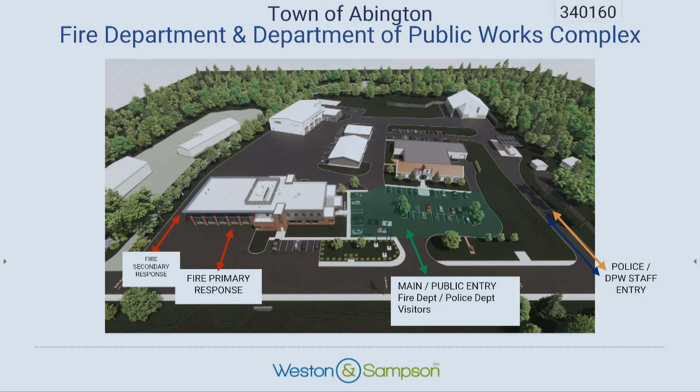Let's go to the proposed buildings. I know everyone knows how to read blueprints, but I think this is a little easier. As you can see, here's the existing police station, here's the existing vehicle maintenance and police building, and here's the proposed fire department, proposed DPW, proposed salt shed, and proposed fuel island.

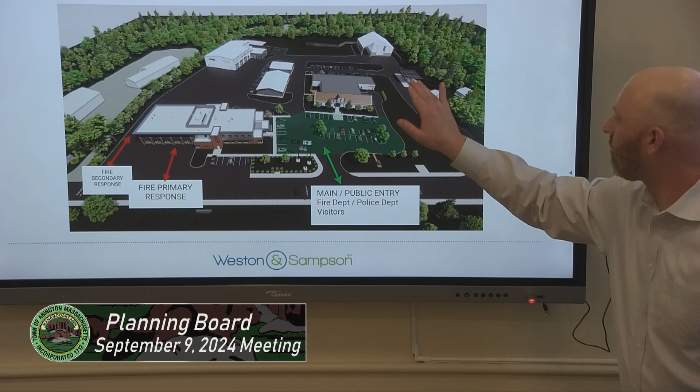A lot of the comments from SEA noted there's a lot of street openings, a lot of parking, a lot going on at the site. So we need to clarify some of the site signage and entrances—we want to make clear this is only visitor and public parking here. For best traffic flow, we turn vehicles left a lot, especially for large vehicles and apparatus for the fire department, school buses, and DPW equipment. The next slide might make more sense.

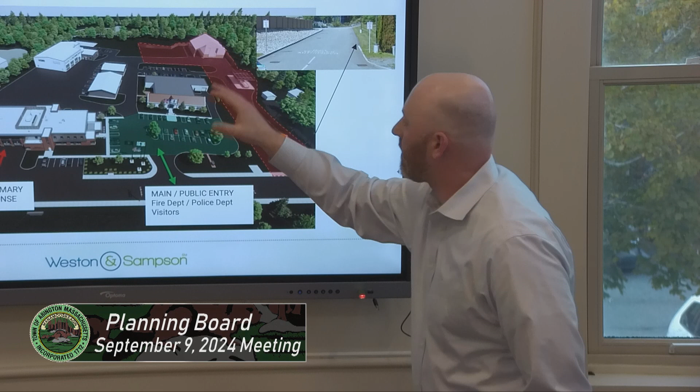Just to clarify, we are doing this project in a phased approach to help with cost and temporary facilities. Right now the fuel island exists here, so they can build the new fuel island while this one's ongoing, since it fuels the whole town—same with the salt shed. The existing salt shed is over here, so they can build the new one while using the old one. That plays into a lot of things, and here's some site signage we plan on having.

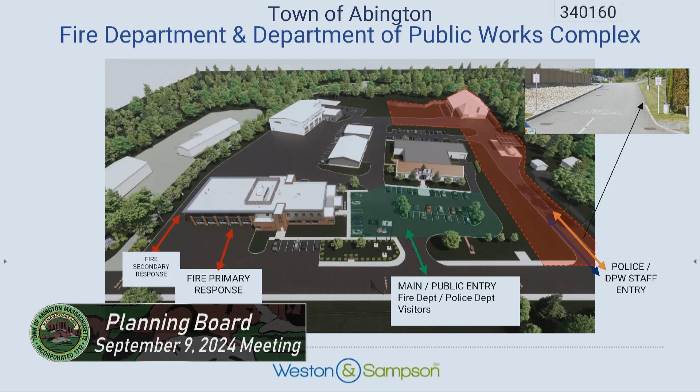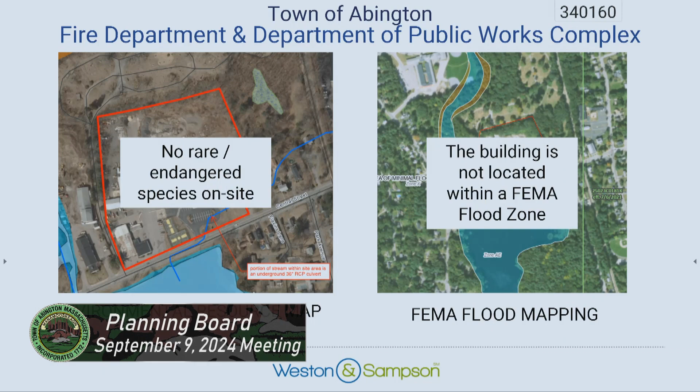Oh, sorry. Oh, Jesus. Do you have the mouse thing? Can I just back up? There's a stylus around behind the screen. Yeah, it's gone rogue. I wish all the presentations were like this. Seriously.

Alright, so here's an idea of how the trucks would typically rotate around the building. If you turn left, it's easier for the driver to see left than taking a right. So they can come through here, fuel up, salt, go back out. The vehicle storage is right here as well. The fire department will use the front apparatus bay to turn around in as well.

As you can see, this is the main entrance, and we'll make sure that's clear. But the rest of the site will be private employees only, municipal town workers.

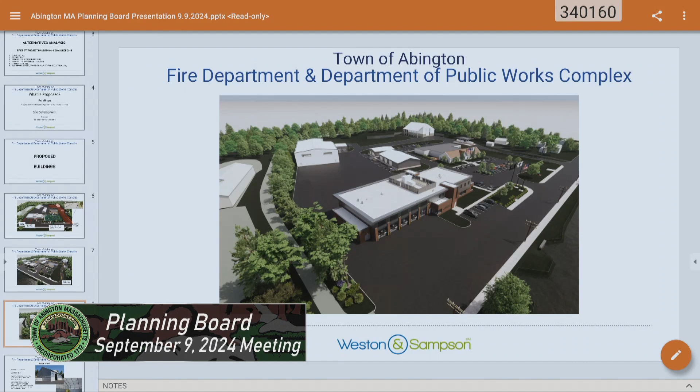Cast-in-place walls that abut and retain, so sized for the town's needs, weather tight, and then can utilize this dual function space during the summer months where they're not storing salt. Currently, the DPW salt shed is falling apart, not sized adequately.

And then proposed site development. Just want to specify there's no rare endangered species on the site, and the building is not located within a FEMA Flood Zone.

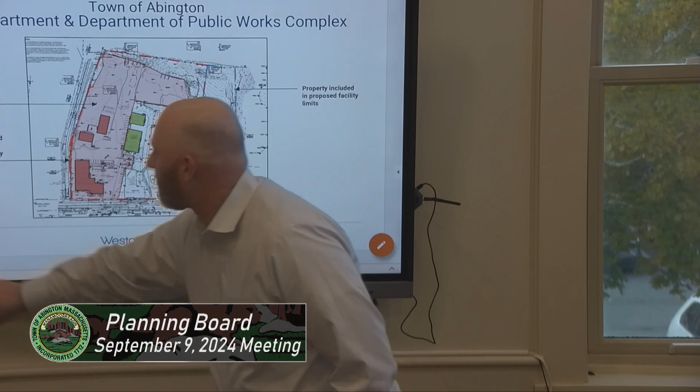As you can see right here, the gray shaded area is pavement, the blue is the proposed buildings, the green are those existing buildings again. We're kind of working around the police station and trying not to minimize their operations. We have met with them. They are happy with everything.

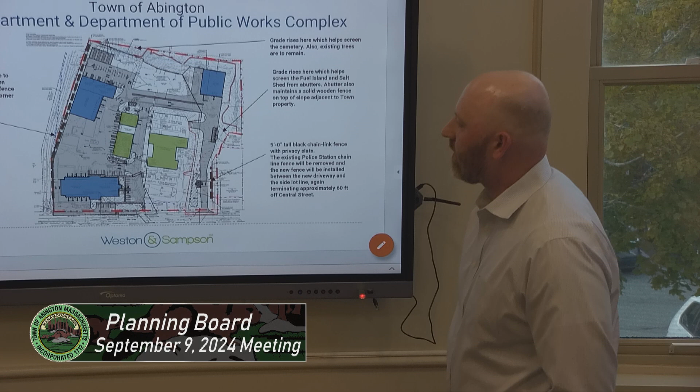And then regarding the buffers, and this goes into that approval, where Sean and the building committee met with the cemetery department, and they went over the 6-foot-tall solid wooden fence that they're going to replace on the side. Right now, it's currently fallen over. This is a cemetery drive, so we're trying to make sure that they're buffered.

The grade rises in the back, so we're not putting any fences there. There's current trees, and then the grade also rises here. So what's nice is, we've had complaints from neighbors who say the salt shed's really, really large. Luckily here, we're building it into the hill, so that minimizes a lot of residential visuals here.

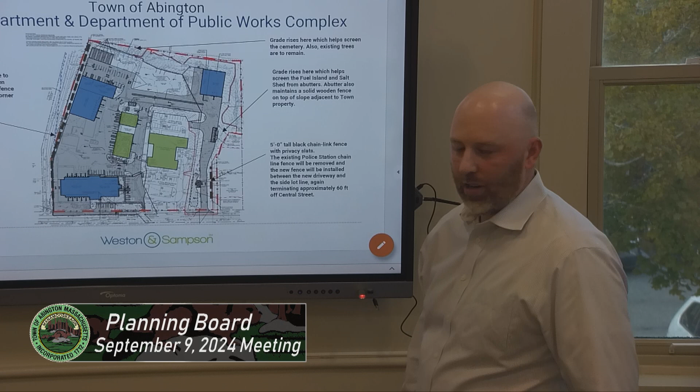And then we're also going to put back, so Mr. DiCarlo doesn't see anything, a 5-foot-tall black chain link fence with privacy slats. At the end, maybe he can speak on anything if he's interested. He's been very helpful, he's been at all the town meetings.

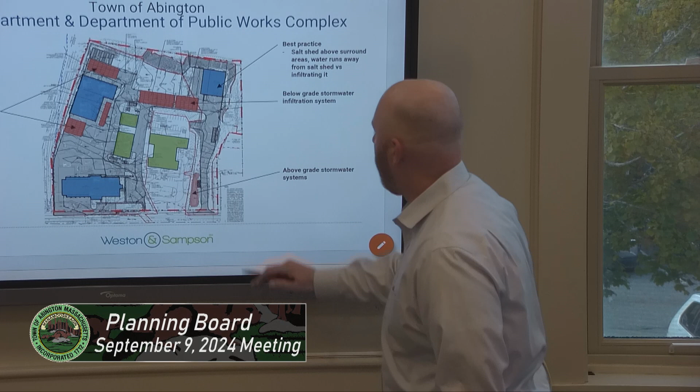And then here's the stormwater. As you all know, it's across the street from a pond. High groundwater here is very difficult for the stormwater. So we try our best to do above grade stormwater systems, but sometimes you just have to go below grade with detention systems. As you can see in red, these are all below grade, you will not see these. And then we have one in the front that's a bioretention swale.

And I'll jump in here and give a little bit more of an overview. I'm a civil engineer on the project. So our approach to stormwater design here was a combination of redevelopment and new development. Obviously the part on the west where the existing DPW facility is, that's redevelopment, that's mostly impervious right now, with some gravel areas, compacted gravel areas in the back that the DPW uses for storage of materials.

The new development is the additional parcel that the town purchased, which will be occupied by the salt shed and the fuel island in a proposed condition. The new development will be meeting all of the Massachusetts stormwater regulations fully for peak reduction, recharge to the groundwater, and TSS removal, which is required up to 80% TSS removal.

Now the existing portion that's redevelopment, unfortunately there are a lot of constraints, as Brian mentioned, one of them being very high groundwater. So we will do the best that we can, but it's going to really meet some of those requirements to the maximum extent practicable.

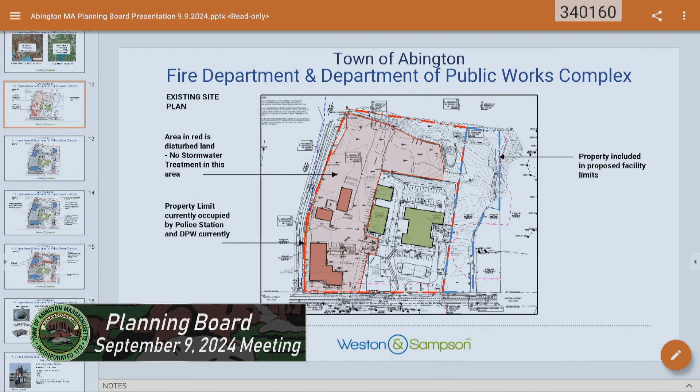So this is some of the structures that we propose as part of the treatment train to provide that TSS removal. On the existing facility side, where we're proposing treatment to the maximum extent practicable, we're going to have deep sump hooded catch basins, which connect to the proprietary stormwater treatment hydrodynamic separators, and that provides pre-treatment. Then that runoff is directed to the mostly underground detention systems.

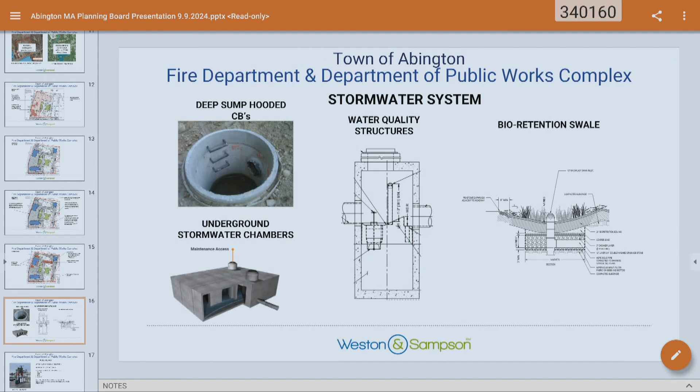We generally love to use infiltration, but because of the groundwater on the site, in a lot of the areas in the southern portion of the site, we don't have the minimum separation from groundwater to those chambers. The only exception is, if I go back here...

This one area is going to be an infiltration area, and that's going to receive a lot of the runoff from the new portion of the development, mainly the salt shed. That is approximately 10 feet higher than the elevation at the street, so because of that difference in elevation, it allows us to have the separation from groundwater that's required.

And also in the front of the site, we're going to have a bioretention area that's just going to get mostly runoff from the driveway.

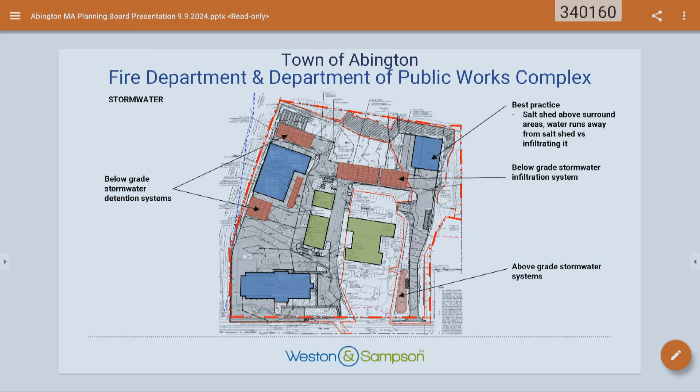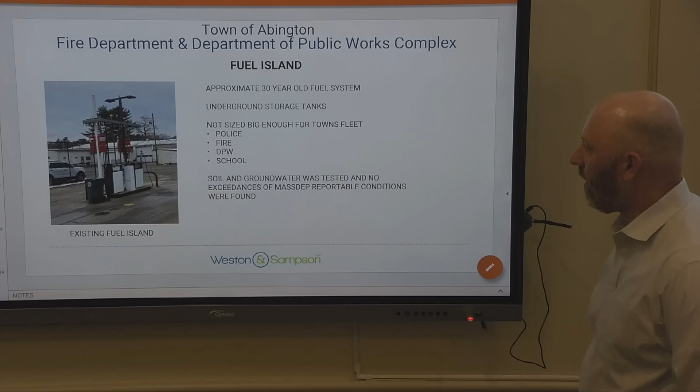Just another few things that usually come up is fuel islands. Obviously the existing fuel island is 30 years old, underground tanks, not sized big enough for the town's fleet, which the school buses also use as well. So that was kind of brought into this project.

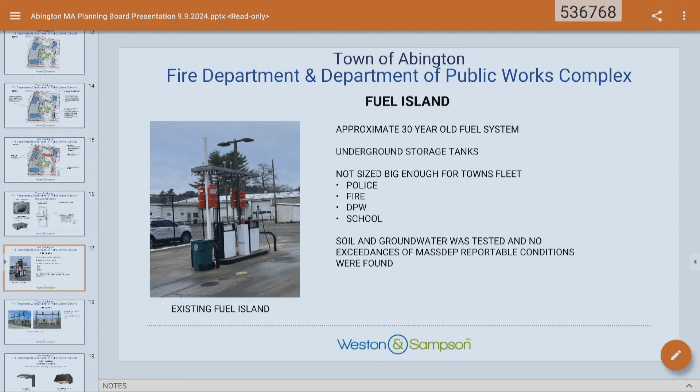The soil and groundwater was tested and no exceedance of Mass DEP reportable conditions were found. That's always good, not saying that anything may not be found during that, but we tried to find it. That's the goal, that way we know.

One thing another Mr. Carlo comment was that currently the police station shines into his house, so we'll probably deal with that as well, but right now we try to make sure that nothing from this project would go off the property line. Everything's dark sky compliant, full cutoff, and we try to make sure that that works. I know that's a big concern a lot of times with the abutters.

And then just with the building features, some of the things we're doing in this project, trying to make sure that occupants and employees are safe. We have energy efficient buildings, resilient design. These are departments that can't go down when the rest of the town goes down.

Efficiency gained through the consolidation of departments. We've done these types of projects over the years where we've combined multiple departments and it seems to work really well for the town. More secure facility.

The police are there, they notice things at night when maybe someone's in the DPW yard that shouldn't be. Full sprinkler coverage - right now a lot of these buildings aren't sprinkled. Adequate ventilation and adequate lighting for the employees and vehicles that are stored inside. And then improved parking lot and site features, because right now, as you saw earlier, that site...

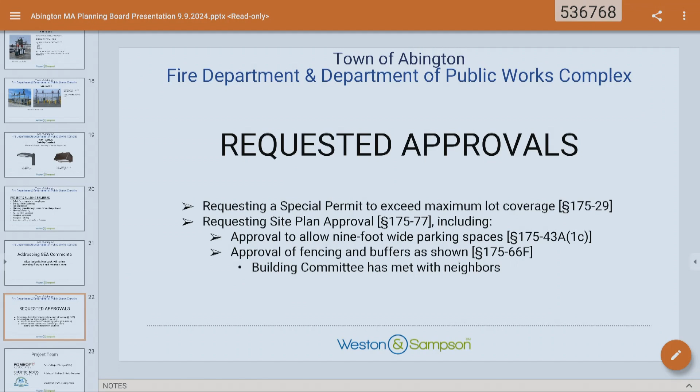I'm sure there'll be questions.

Larry, I'd like to ask you if you could just do a brief summary. We've read the letter that you sent us. Could you just give us a brief summary of your comments, please?

Well, my letter, I tried to follow the criteria that you guys have set forth for reviewing these kind of site plans. So I tried to go through those one by one.

One of the things that kind of struck me was that we talk about these being individual lots, but these parcels have not been combined. And we talk about zoning compliance and having more than one building on a lot, but we don't have a single lot right now. So I think it's really important that all the pieces that make up this site be made into a single lot.

So there needs to be an 81X or whatever to combine the parcels. And then that'll set the stage for also being able to show that you have the setbacks and everything to the property lines. That'll all come into play, certified by an RLS, and I think that'll make it the one lot scenario that you're trying for.

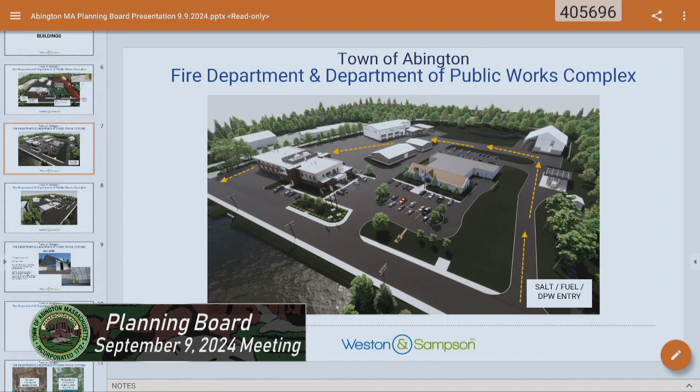When the police get a call right now, they come out of here, this is their police station employee parking lot, they come out and go right through the edge of that parking lot, where the basketball courts are. So they would come right through here and basically go through the parking lot, the same entrance that the residents use, the public driving entrance.

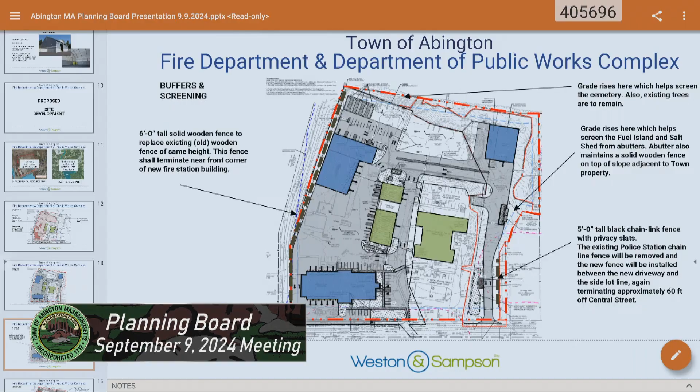Can I add one thing to that? Talking about police, 80% of the time though, they'll be responding from the road, not the station, so it's not going to be frequently used by the police since they'll be responding from their cars. It's just a little easier to see it here. They're not racing out of the police station, most of the time they're coming from the road somewhere else.

What did we get to, where was that one we had? The actual plan, oh, that's right here. So now, with the addition of this new driveway, as we've talked about before, the two things that have to be working 24 hours a day, 365 days a year are the fuel pump and the salt shed during the winter. So we went through a long discussion about when and how we can raze the existing DPW buildings, and what we're going to do with the DPW when they have no buildings.

So just so you know, and you may have already heard, the thought is to bring the materials up to North School, and that's where they would basically store things during this 1 to 1.5 year construction project. The salt shed, though, we didn't want to build another one off-site for a year and then dismantle it and rebuild it back here. So the committee and our project manager came up with this phase one, where we develop this driveway, the salt shed, and the fuel island, and at the same time we had to remove that fuel island. Once that's done, we can start demolition of the DPW buildings.

So when we put in this driveway, we also planned to connect it to the existing police station parking lot. So now when the police, if they're parked at the building and get a call, instead of coming through the public parking lot, which is now going to be expanded, they have a dedicated travel lane where they can go out or come in if they'd like. They have the option, if God forbid there's something blocking that road, to get in another way. We want to have a little flexibility, but this would be an emergency access for police if need be.

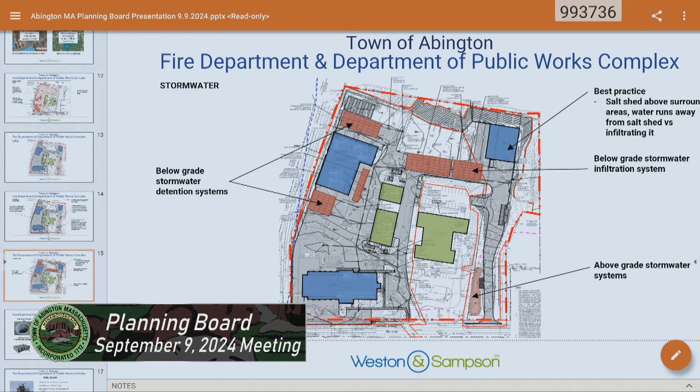The fire department, as we mentioned, it's obvious up in the street, much like Route 18, much like Rockland Street. For the most part, returning trucks would come in, it's 60 feet off the road here, so they have some maneuverability to back in, because in most cases the frontline vehicles are up front.

Vehicles would exit the front of the building, and there's still going to be a second layer of vehicles in the rear part of each bay. So the bays aren't empty, they can't just drive through unless everybody empties out, which likely won't happen. But for the fire department, when they come back and need to refuel, they come right up here, refuel, and can get back to their building, whether they're coming in the front or the back bays.

Is that right driveway two-way or one-way? Two-way. All right, so there's enough space for two vehicles to pass? It is wide enough. Everything's a little bit more generous here. But that's not the circulation you intend on.

The police are going to use that in and out all the time? Honestly, we met with the police chief and talked about this, but that was two police chiefs ago, about six months ago. The new police chief was literally sworn in about fifteen minutes ago. But this is our suggestion, because now they have no conflict with any public parking up front by using that. I can't tell them don't go that way, but that's going to be the easier, safer way for them.

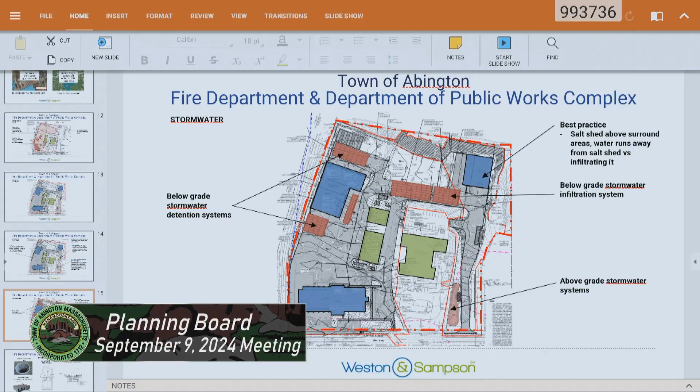Similarly, the DPW usually leaves in the morning and is out of the project for most of the day, so most of their vehicles, since they're stored here, will be exiting this way. The fire department averages maybe eight to ten calls a day or more, but they're right there up front, so they're not going to be driving around out back all day. It's really just the tower apparatus that'll be pulling through.

Everything else we back in. Yes, I'm sorry, you're right. The tower has its own dedicated bay, so it can enter from the rear to get back into the garage.

So we've worked on coordinating this traffic flow, looking at what happens during the winter, the non-winter months, and during emergencies - this is basically our emergency operations center. We've made sure every building will be powered by a generator. The vehicle maintenance building wasn't, but it will be. The DPW will have a generator, the fire department will have a generator, the police department has a generator, and we're connecting the fuel pump to that generator. So this will be kind of a standalone emergency complex.

Within the limits, do we wish we had more room? Yes. We're trying to use the site as efficiently as possible, when you have a DPW that's now basically losing part of their storage area because we're putting the fire station on there.

And there are areas that we've intentionally left as extra pavement - we did that on purpose, and we'd like to preserve that pavement for two reasons. One is for the maneuverability of our vehicles, for our trucks. Also for training areas out back behind the fire department, they might use it for training, but also we just don't know yet where we're storing things and what we're storing.

There is a proposal to build a storage canopy on the western boundary line, right over in this area, if money allows. We have reserved room up here for a future storage building - not in our budget, not in our project, but we've tried to design what could be added in 10 or 20 years if we needed or had the money. So we're trying to build this for now, but also build it for the future.

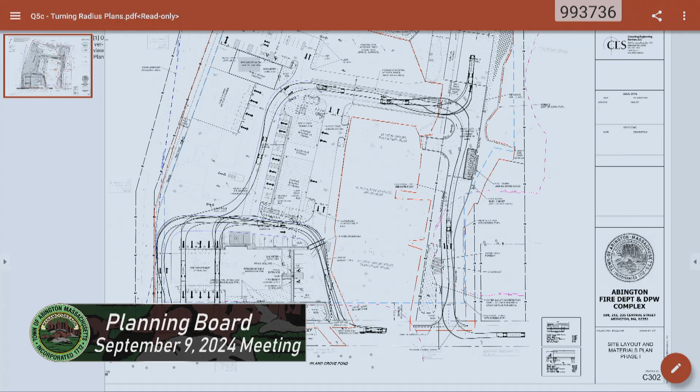So we are working with neighbors, the police department, the fire department, the DPW, the water department, to a limited extent the sewer department, and the Conservation Commission.

It's been a project, but I think we are well on our way. Our project manager has been guiding us through this, and we've got a good team together. We welcome your questions, because it's a lot easier to change things and improve things on ink and on paper.

But I wanted to explain to you that there has been a lot of discussion about some of the items that you brought up, so I don't want you to think we just glossed over anything.

There's one thing about living next to a fire station - you're usually the one that burns. I've lived next to a fire station and the house next to it burned. Thank you. Yeah, I feel your confidence. Well, that's what I'm just thinking - Eric knows I have two younger brothers that were both retired firefighters, so.

I do. We know the routine.

Mr. Chairman, one of the things I'd ask is that you really detail how you plan on doing snow storage, because you've got an awful lot of area there to control and manage. And you're keeping all these lanes leading to the left side of the fire station, and I guess you'd like to have that wide open pavement. I want to see how that pavement is preserved to make sure traffic is not impeded and somebody's not parking where they shouldn't.

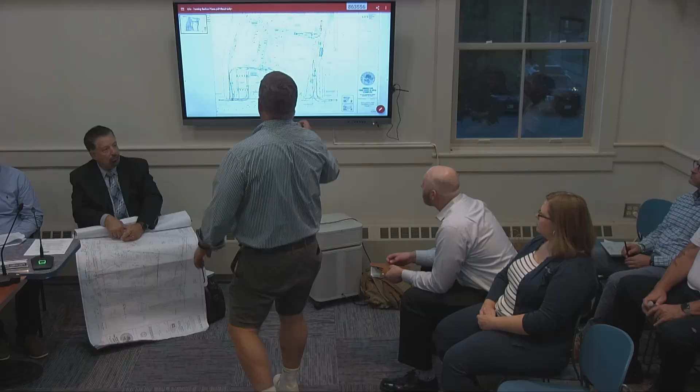So when you say public, 31 public spaces, what do you mean? The police station's parking lot right now, we're adding more spaces over here in the fire department, so it doesn't show it here, but when you drive into the police station's front parking lot, that entrance is still the same. We're just adding more parking to the left where the basketball courts are.

My one thought is, aside from street hockey, I've never seen more than 8 cars in that police lot. Right, unless they're having a large community meeting. There is a training room, community room in the police station. There's also one proposed in the fire station.

So that would be when that parking lot would be the most full. Rather infrequently, but we plan for it. Yeah, I guess, do we really need all the parking? I mean, I know our bylaws call for a certain number of spaces, but what we're seeing with everything we build, they're never used. Even Target on Black Friday has never been half full.

I agree with you, and I know there's been a recent big push with stormwater management to reduce unnecessary pavement. I'd be happy to work with them more, if we can eliminate some of that front lot and get more green space. We tried to look at the street view, so we have the green space existing in front of the police station, and then the green space we're putting in front of the fire station.

Once you're out back, you're in the working man's land, and you basically can't see it as you drive by Central Street. Did you want to add something, Brian? It's a load-in, but yeah, I guess we have to follow the rules, so I don't know what the thought is on that, but I guess we'll have to brainstorm some things potentially and get back to you on it.

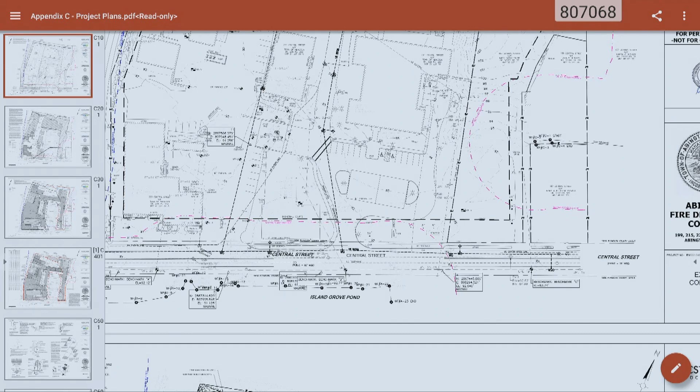Add to that, I don't really have a problem with the amount of parking, because these guys - this is all heavy-duty machines, oil, gas - it just needs to be captured in pavement, if anything else. But everything that's on the site is heavy-duty industrial.

I just want to make sure, because I didn't see it - they're probably in the plans - but I just want to check that the road construction has a deep enough base that it doesn't crumble over time, especially when the water's so high up at the table. Yeah, it's all heavy. I didn't want to see it crumbling at the street.

And just to go on that subject, we've been asked over the years, why don't you use porous pavement? That doesn't really work well on these sites, no one's going to clean it, they clog after 6 months. I don't know what it is, but it's like a 5-inch system at least, probably, right?

Well, usually you wouldn't use it for a DPW because, as you mentioned, there's a possibility of spills - they have oil and other materials, you don't want it to percolate. So this is a land use with high potential of pollutant, and that's why there has to be a vigorous treatment system, and it's much easier to clean up if it's paved and it goes into a system that's accessible for cleaning.

And actually, I'm thinking less technical than that - the roads have a base in there; typically in a parking lot you don't get a base, and it eventually settles. Streets and Route 18 are done totally differently - they've got a heavy base, probably a foot, like my driveway's got. They got a foot of base, and that's the base I'm talking about, being able to be stable and not move.

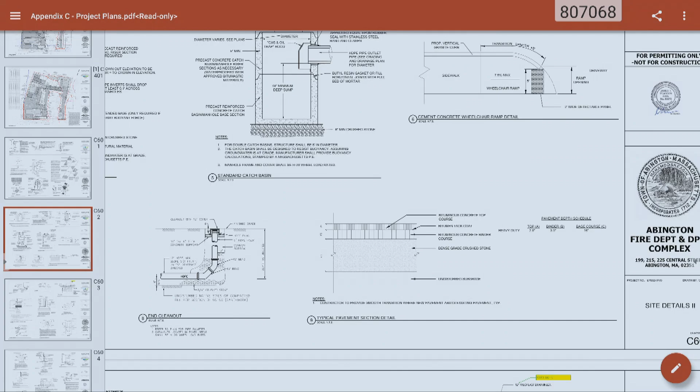16 inches of dense grade is what we're showing. So it's like crushed stone with bluestone kind of mixed in it. That's the base, yeah, 16 inches - okay, and that's exactly what I was looking for. I think that's the Mass DOT highway spec.

Because the DPWs are going to be the heaviest abusers of that, just because their machines tear it up and they turn around and drop salt and everything else.

I would be hesitant to reconfigure the police station parking lot for two reasons.

It is a public safety complex, and it's possible the police department could be having an event or meeting at the same time the fire department is. The other thing, frankly, is an added cost to the town. We would have to remove and relocate their existing lighting system, rip up pavement, put in new pavement, all that. There's a cost to that. I think in this case, it might be safer, better to err on the side of having that available parking for the two uses sharing the parking lot, and kind of leave the police station.

One of the big things we've been trying to do is make sure the police station can continue to operate throughout phase 1 and phase 2 of construction. The more we can stay away from their front area, the better, basically. So I understand your point, but I think in the long run, it might be a good investment to leave things as they are. I have a couple questions, but I'll defer to my colleague, Mr. Shepherd. I have a few more if I can continue.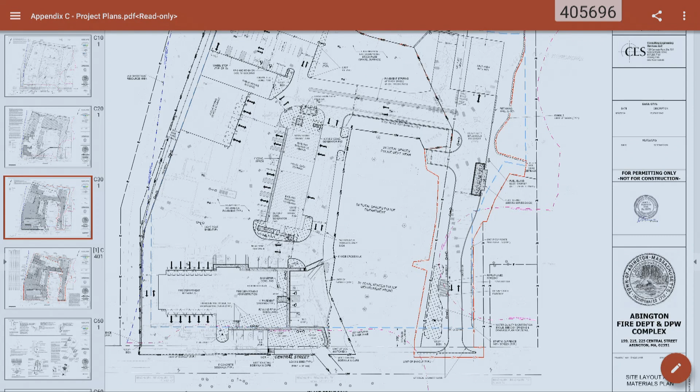Are we also taking care of part of what I'm still calling the air base? Are you getting any calls to go there, or will you have any calls to go there? Just wondering how far out you're going to reach. Very rarely right now. The biggest thing is during brush season, we're getting brush fires over in that area, but they're very rare.

We access that off of Spruce Street, so it's easy for us. I'm actually kind of thinking of sound, which I always thought was nice, that you don't typically hear the sirens going off when they leave the station. They kind of wait, but then people down the road get the sirens. I imagine there's a lot coming out onto Washington Street to go left and right to get onto Route 18. I'm just wondering, because when my office was across from the fire station, I heard it go off quite a bit. I didn't live in the house, but it wasn't so bad.

Are you asking how we're going to navigate traveling? Yeah, I'm just kind of talking out loud, that most of your traffic's going to flow left and right on Central Street, then break off into Route 53 or Route 18, those are your main connections. This is an ideal road, it's the only road that lets us get from east to west.

Without being impeded by the train - so many times, if we have a call on the eastern side of town, depending on where we're staged, somebody always tries to go down this road. Say there's a fire at Target, and Station 2 off of Rockland Street, their engine pulls out. If they try to go down Center Ave and the train's coming, there's nothing they can do, nowhere for them to go. They can't get to the park because that's on the other side of the track. So we typically try to always send somebody down this road, so we can't be stopped by anything. We utilize this quite a bit, and go through those intersections every day.

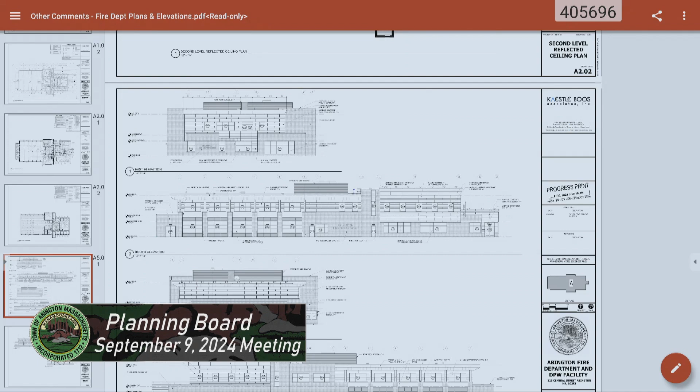A lot of times the energy code requires you to design roofs for solar load now, that's all day long. A lot of times we don't do it on municipal projects, we do it through a PPA, a power purchasing agreement, where someone comes in afterwards - we find that works the best in town. Some towns are getting maxed out though, and some utilities are being difficult, but we usually don't find it beneficial as part of the project. Abington was pretty slow to adopt solar - Harvey Hurwitz put it on Cape Cod Lumber and stuff like that, but we don't have big solar fields in Abington like most communities.

So I guess this is a question for either of the engineers - there's gonna be a lot of trucks going through there, some old, some new, fire trucks coming back from scenes. They're gonna be dirty, there's gonna be things leaking, maybe not from the fire trucks, but from other pieces.

As they're rolling down these roads, the stuff gets washed off into the basins. How is that treated, since this is a kind of a heavier use?

There is a pretreatment for the stormwater on the site that's going to be DPW. Right now it doesn't have it, but it's going to be deep sump catch basins that have a 4-foot sump, so a lot of the oils float, and there's a hood for the outgoing pipe that separates the sediment and some of the oils. The town, as part of their maintenance, has to suck it up every 3 to 6 months.

Downstream of that, there's a hydrodynamic separator, which is also like a manhole structure, but it has this hydrodynamic action that rolls around and lets smaller sediments settle down and separates some of the oils. It also has to be maintained by DPW. And that's sufficient for what they need?

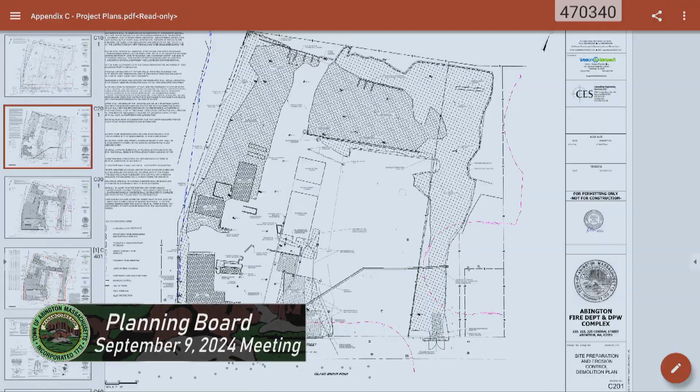A number of them right next to where the fire department station's going. So we do have a bylaw that says we have to figure out what trees are coming down of a certain size and whether or not they can be replaced according to a certain calculation. Was that language not online yet? Yes, it is. Okay, so if you're not going to be meeting the standard, we need to see that as another waiver.

Because I think you have some plan for the eastern boundary along, I think, Mr. DeCarlo's property. And they're a nice mixture, wonderful, but we need to make sure that they're meeting our requirement.

Is the site going to be secured any differently than it is now? Right now, you can kind of go back there any time at night. It's going to get more developed. There's going to be more things back there. Are we doing any other sort of security, separating out the fire station areas from the DPW areas? Lighting and cameras, which don't exist now.

Okay, there's no... limited... trust the firemen, they're okay? Fire department's there, we're there 24/7. So you're not gonna be breaking into the fireman's cars? All the buildings will have access control too.

Over the years, there's been people, gates, or we're doing gates here, we're not doing gates. We found that it seems like a lot of people like to do video cameras, so they have a record too, if anything happens, for like 90 days, if someone's stealing salt, which has happened. Like you said, everyone's here at the site. I haven't done a municipal complex with a gate. We've done gates before too, and after a while, they get sick of them and they just get left open because they're a pain to open and close all the time.